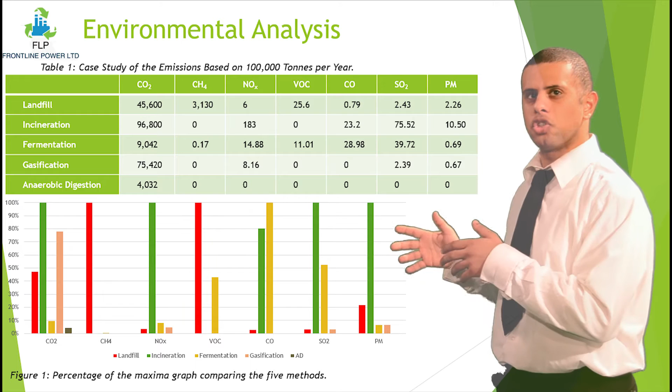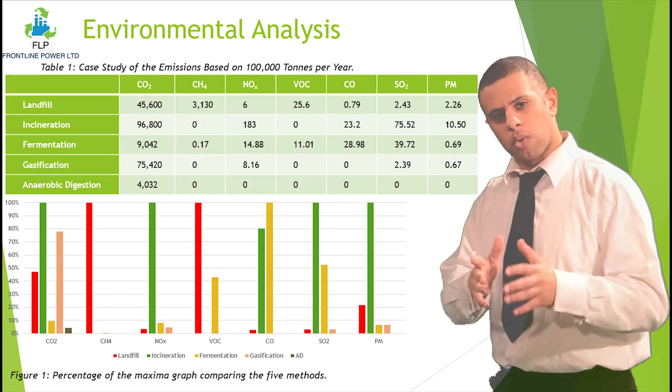Frontline Power Ltd has conducted a case study based on 100,000 tonnes of municipal waste per year, which approximates the emissions produced for the main leading solutions, and compares this with landfill emissions. As shown in the analysis, incineration produces the most carbon dioxide and NOx emissions, as well as particulate matters. After conducting market research, Frontline Power has established that anaerobic digestion as well as gasification are the most optimal solutions. Here's a quick view of our process.

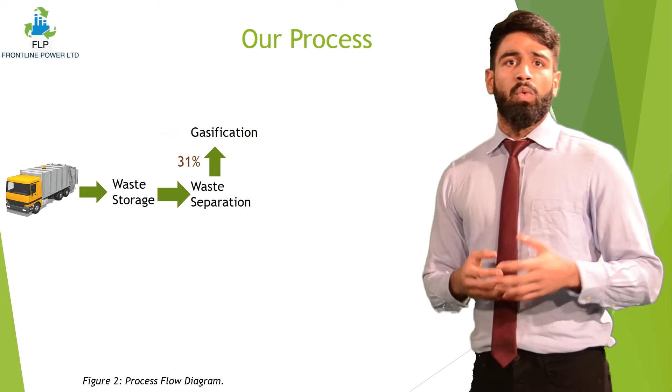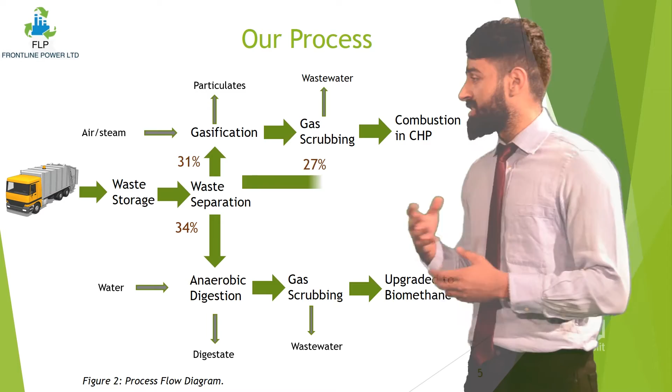Landfill waste is redirected from traditional landfill sites to our waste storage facility in Newtown, Birmingham. Once at the site, the waste is separated into 4 different groups. 31% is sent to a gasification unit where syngas is produced to power a combined heat and power unit. 34% of the waste is sent to an anaerobic digestion unit to eventually produce biomethane. 27% of the material is recyclable and 8% is unusable and therefore sent back to landfill.

Hazardous materials are removed from the landfill waste by way of manual separation. This is then fed into trommel screens where the materials can be separated by size. Sink float tanks are in operation to separate materials which are biodegradable. Magnetic separators are used to separate different materials, and finally air separation can be used to separate the waste by weight.

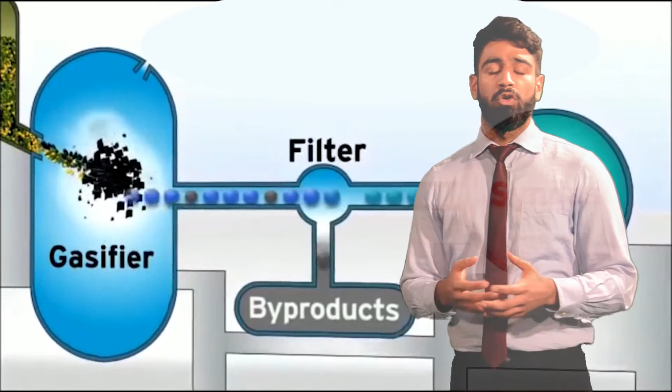The gasification process starts by combusting the waste material at a temperature of 700 degrees Celsius in oxygen-starved conditions. This endothermic reaction leads to the formation of syngas, but it also contains unwanted particulates and compounds such as tar, char and hydrogen sulfide. The purified syngas is combusted in the combined heat and power unit. The heat generated is used to maintain the reaction at the required temperature. This is a self-sufficient and cost-effective process.

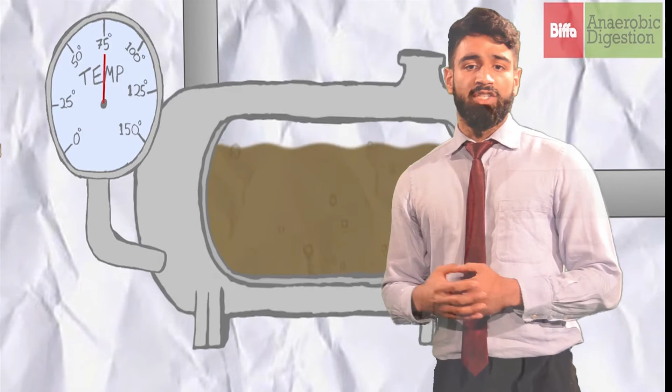34% of the landfill waste will undergo anaerobic digestion. Initially, hygienisation at 70 degrees C for 1 hour takes place to reduce contaminants. Following hygienisation, the waste material undergoes digestion with a thermophilic bacteria. The digestive process takes around 7 days and is monitored until 75% of the waste material is converted into biogas. Digestate is a side product of the reaction and can be sold as a fertiliser. Biogas is cleaned and upgraded to have a 93% methane purity.

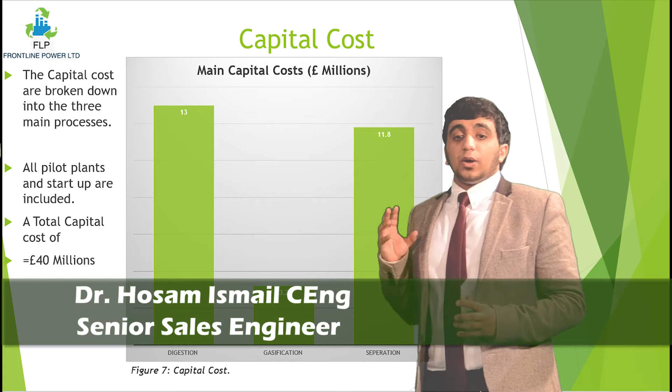So mostly our capital costs are broken down into 3 sections. Our gasification unit, combined with our separation process. And finally, our biggest investment, which is the digester. This is a diagram which breaks down the operations which we believe are going to be the most costly in our process. This shows the costing at about a total of £40 million.

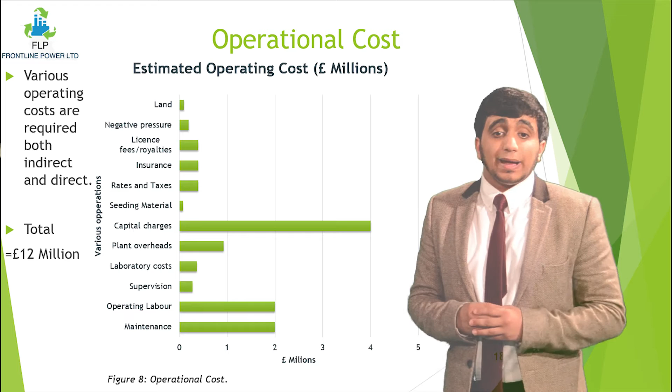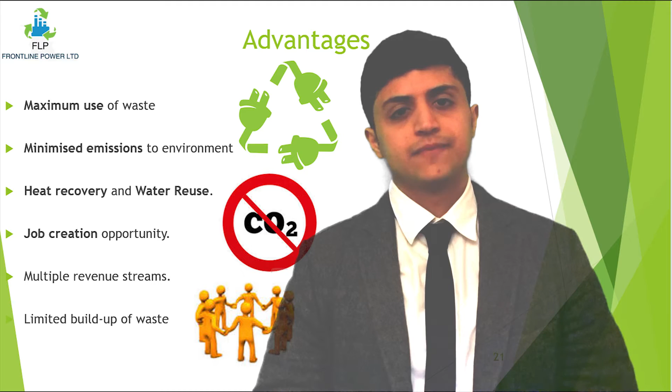This process of using anaerobic digestion and gasification is the optimal solution to combat the effect of climate change. Frontline Power Ltd strongly believes that this project is the perfect solution to the increasing waste produced in Birmingham, which will ultimately end up in landfill. By utilizing this process, we can mitigate the catastrophic effect which will eradicate the landfill crisis.

Birmingham City Council aim to have no landfill sites by 2035, and Frontline Power Ltd resonates with this aim. We strongly urge you to invest in the required capital of this project. This here could be the future. Don't delay, act today.